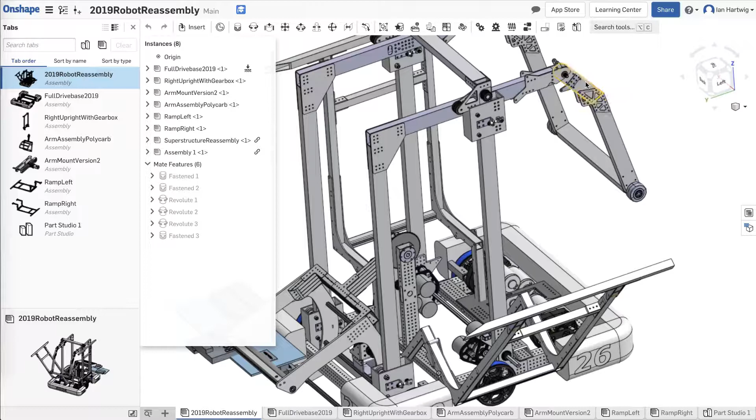You can see, for example, this tube is 2 inches by 1 inch across, and we put a bunch of holes into the right place, and then it has plates on the outside. There's other places where, for instance, there's 1 inch by 1 inch tube, like in these ramps, as well as in the drive base.

And typically, when we're early in development, we don't know exactly where things are going to go. We'll put this standard hole pattern on all of the tubes. So let's learn how to make these tube structures and efficiently put all these holes in.

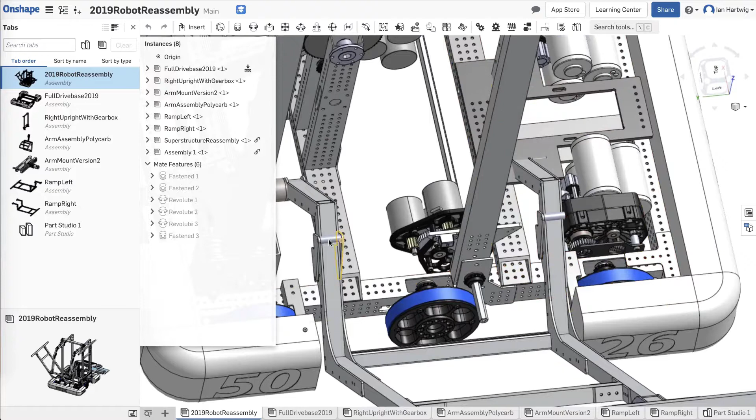So going back to the document we had before, we're going to go to the plus sign down here in the left and insert a new part studio. So now here again we're at the blank 3D canvas, and I'm going to rename this one to be drive tubes, since that's what I expect to be drawing. And we'll select this top view again and go back into sketch mode.

So in this case, the sketch is actually pretty simple. We want to start with the rectangle of the tube. So we're going to use that rectangle tool up here again, and we'll plop that down, and then we'll hit D for dimension.

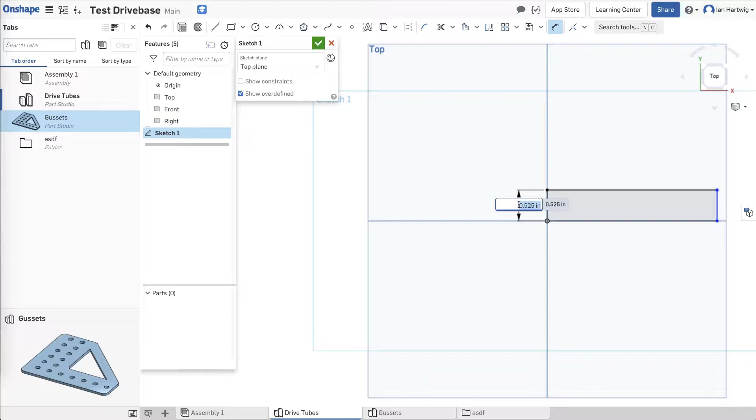Let's do the front tube that's on the drive base first, and that's a 2 inch by 1 inch, 1/8 inch wall. So we're going to put that 1 inch in here, and I happen to remember that the tube on the front of the robot is 27.75 inches long.

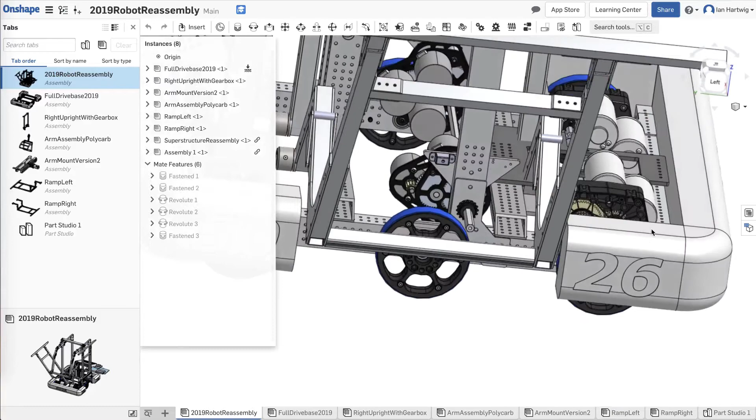Now if I wanted to look at one of our old models and remember what that was, I could go over here, and I know that the tube in front, for instance, is right here, and if I select an edge on it, you can see down in the lower right that it gives me a length. In this case, there's only one dimension of measurement, but it can actually give you many more dimensions here.

So if I wanted to know, this is actually going to come up in a minute, so let's do this to remember. If I wanted to know how much space there was between this edge and this tube over here, like this flat part, then I could select these two things, and if I go into the details, you can see a lot more information about these dimensions. In this case, it's just selecting the perpendicular distance, which you can see as I highlight is 2.37.

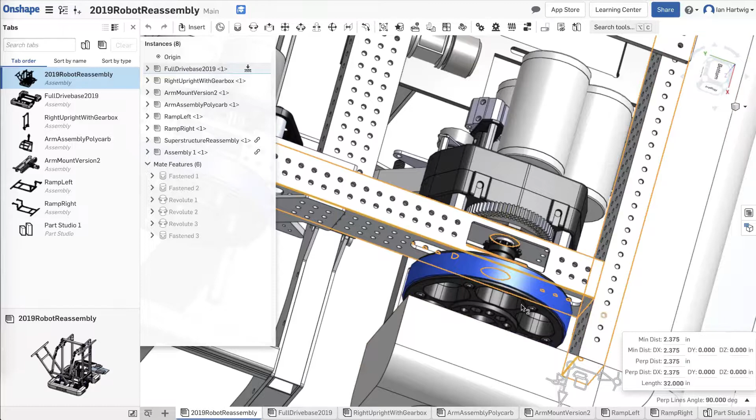But it could also tell you things like different colors. In this case, it's red along the tube because it's in the X direction. As you can see, that matches the colors up here of the cube. Okay, so let's remember that one as well, 2.375. That's how much space on this robot you need for the pneumatic wheels, which are a little bit bigger than these wheels.

Okay, so back to our test file over here. We actually have all the initial sketch dimensions we need, so we hit the green check mark. And now we're going to turn it into a 3D shape. So we select that sketch and Shift E, or just hit the extrude icon. So the default size, 1 inch, looks like that.

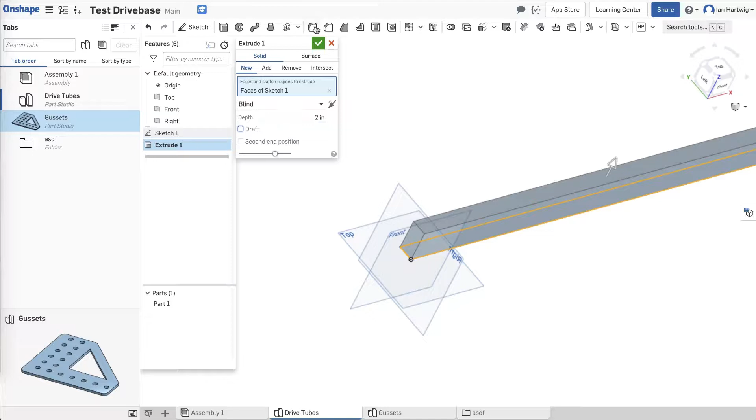So basically, if you were doing a 1 by 1 extrude, you could use this 1 inch depth. But since we want 2 by 1 for the front, we'll do 2 inches. Okay, so that makes the rectangle a little taller. Right now, though, this is actually a solid block. So to tell the CAD program that we want to use tube, we're going to use the shell command.

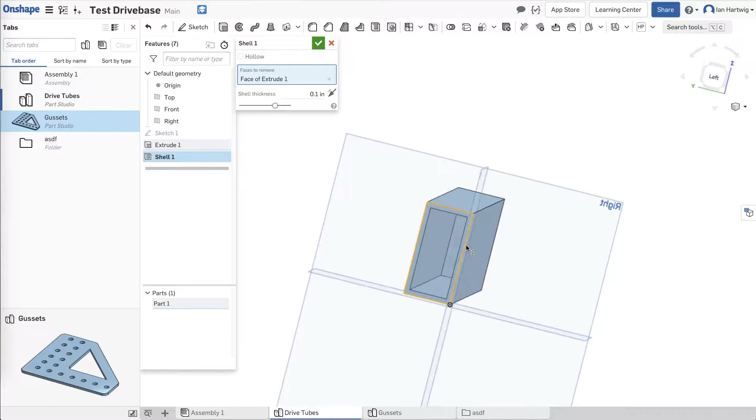And now it's asking us, like the other tools, to fill the blue box content here. So we can select this face on the end, and you can see that it digs out the internal of the part, but it doesn't go all the way through because it's calculating the minimum wall. So if we just swing around to the other side of the tube and select that, now we've got all the way through.

Okay, and we do need to adjust the thickness, so you can see there's a shell thickness field. We're going to use a 1/8 inch tube for this part. So we select that, it gets a little bit thicker, and then we click OK.

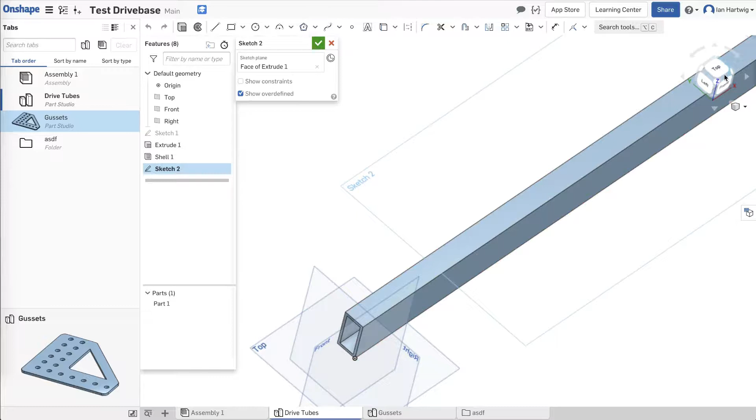So to put that whole pattern down, we're again going to use Sketch, but this time we will use it on the face of the part. So we can select this face on top, hit Sketch. So now this sketch is specific to this solid object. So I'm going to hop over here to the top view again, and we're going to use our circle tool again. So center point circle, hotkey C.

We'll just draw that in, and then we'll do dimension D to put in our 0.192 inch size, and also to put it at a 1/2 inch from the edge. So just zooming in a little bit so I'm specifically not using the angled dimension, I'm using the perpendicular dimension.

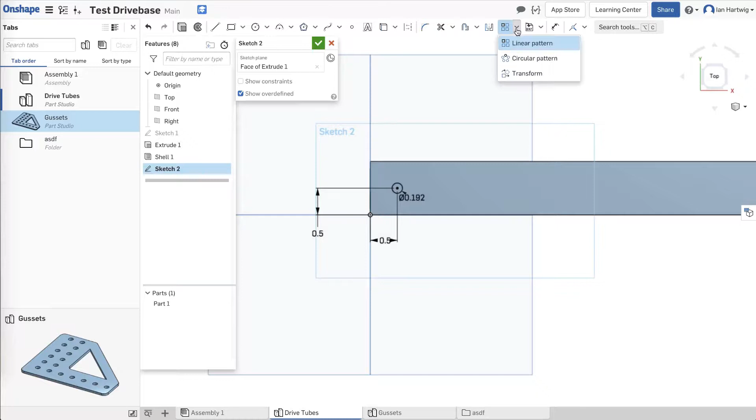Okay, great. So now, like the gusset, we can make this more efficient by using the pattern tool. So I'm going to select a linear pattern over here, hit that circle, and you can see that there's blue suggestion circles here. So let's change it to 1/2 inch spacing. And then we actually want a few more than 3.

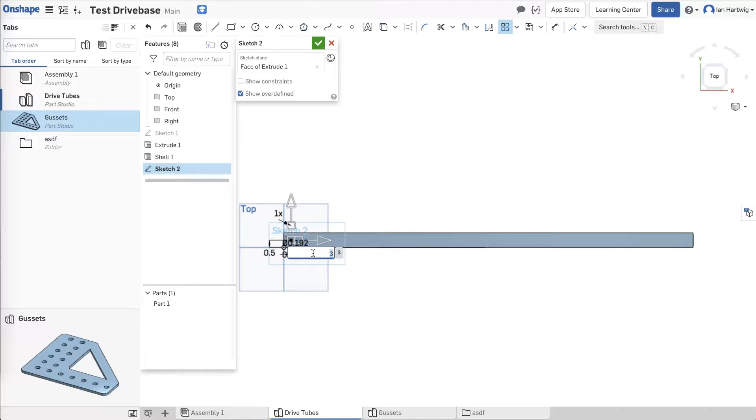So since the bar is like 27 inches, you want like 54, 55 holes. And it doesn't fill in all of the ones in between, but you can see that it draws the last few. So that's the number of holes that we want, and then we click green check mark to accept, and you can see that now we have a lot of black holes. Okay.

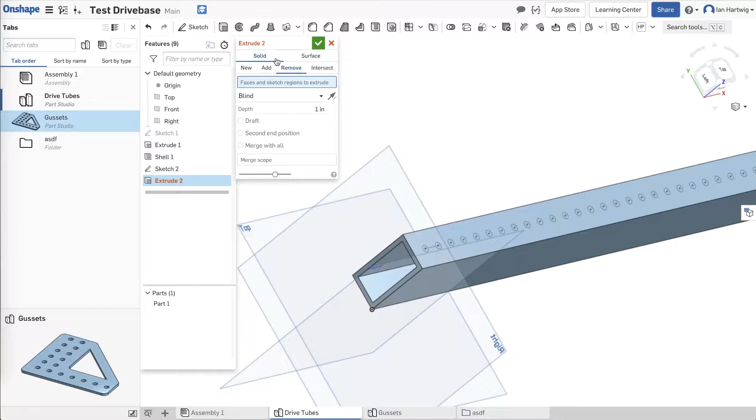This is actually all we need on this sketch, so we click green check mark, and now we want to tell it how to use this. So what we could do is select each hole individually. In SolidWorks you would have an extrude cut tool, but in here you just have the regular extrude tool, and then it has extra details in here, like you could use solid remove and then, for instance, you could select an individual circle and it will drill one hole.

But to be way more efficient about this, we're actually going to select the entire sketch, since all it has is circles on it. If we do extrude remove, it will drill all of our holes at once. So you might notice though that it's only drilling halfway through the part. That's because it has a depth set at 1 inch.

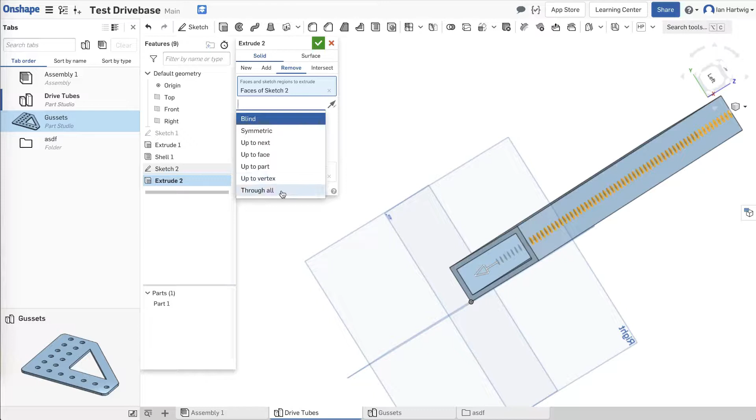We could change that, or we can change the mode to go through everything. So if we change it to through all, now you can see that there's holes in both directions. Okay, and we just click OK, and now we have half of our holes. So let's do the other face.

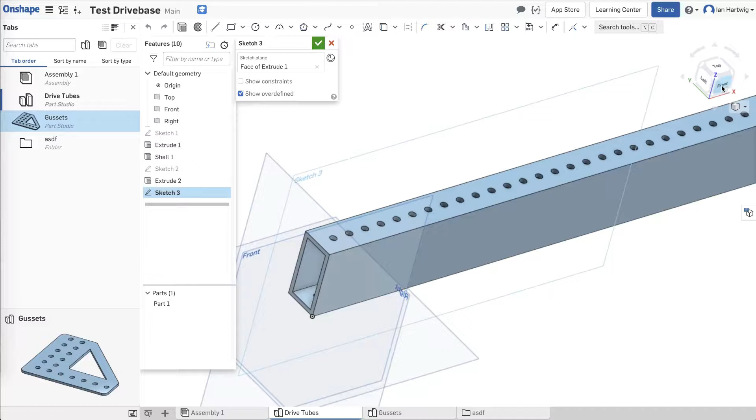We do the same thing, select there, select the front, hit sketch, and now I can jump to the front view. Like before, we can do circle tool, put this in place, we can dimension it, and we'll just put in that 0.5 inch from the front. So this is picking up the dimension in 3D of the shape.

To reduce the number of dimensions in the overall part, I actually want to connect this circle to the ones on the top. To do that, we could use a constraint like we did in the sketches. So I can select the vertical constraint. The only problem is you can see that there's nothing to attach it to. So if I click here, like I want to connect to the circle, then it basically doesn't do anything. So we need another sketch to attach it to.

And it's actually possible to get back to the sketch we used earlier. So you can see it's grayed out in the feature tree. But if we hit the little eye next to it, you can actually see that we get those items back. So now if you hit the vertical, you can select the point that's inside of one of these circles and then hit your point over here and it snaps into place.

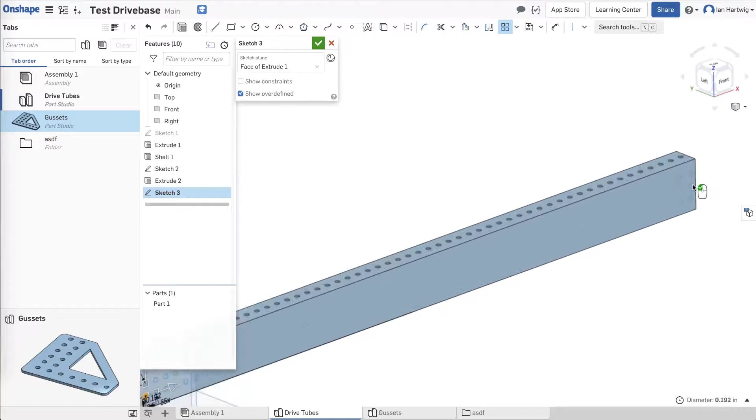Okay, now like before, we give it a pattern. We change the pattern width to be 1/2 inch. If I remember right, we had 55 holes. And we will also set the 2 direction pattern here. So we needed 3 holes at 0.5 inches apart. And now you can see that it fills in the entire front pattern. Perfect. So we accept that.

And like before, we take this, we extrude, solid, remove. We can go through all. And now we have our bar. So I'm just going to shut off that sketch too. And now we have our extruded bar with hole pattern.

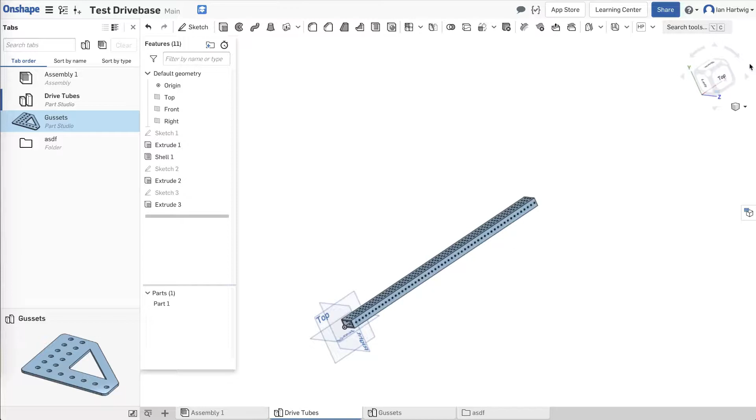So this is nice to have this one bar, but it's much more interesting if we're able to draw an entire structure at the same time. So Onshape actually lets us do this pretty efficiently. So let's go back to our first sketch. And in here, so now we're going way back in time, which is one of the features that this lets us do.

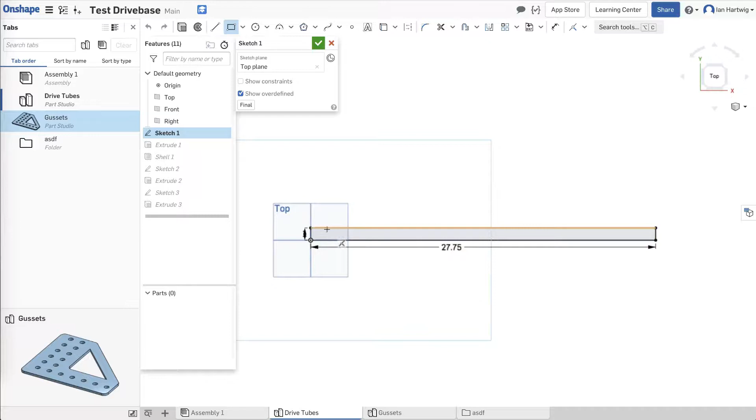And we defined this one rectangle, but let's say we wanted to draw more than that one bar. So I'm going to throw in a couple more pieces of drive base in here. So let's say that we also draw our side tubes, and you can see that it's a little bit interactive on the constraints here. If I highlight to this dot and then I go over, it's actually telling me it's going to fix this point vertical and horizontal. So I'm going to do that.

And now this becomes our back tube right here. And I'm actually going to draw a few more items in. Maybe I'll draw them off to the side here. So these are actually going to be kind of our wheels, so we have a picture of where they are. And again, I'm going to use the dash line here. We can follow this down. And then I'm going to put another one up here.

Great. So let's add some dimensions in here. So the endpoints of this are already fixed because they were attached to the bottom. This one, I happen to know that our drive tubes we like to make 1.5 inches thick. If you remember from earlier, we measured the distance. So I'm just going to cancel that and go back in. Earlier, we measured the distance from here to here as 2.375 inches. So let's just put that right in here.

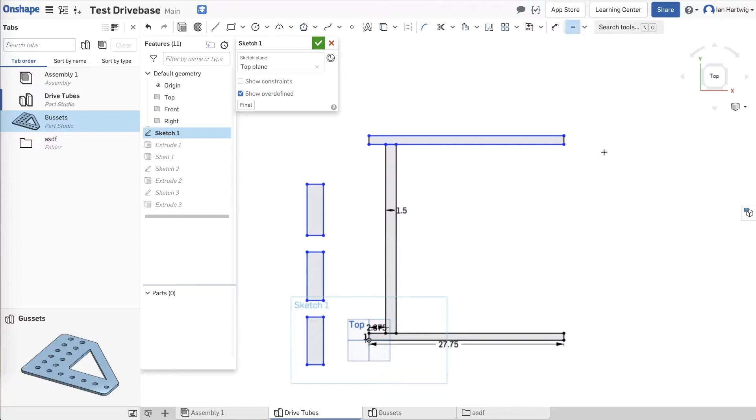And we still have a couple blue bars left. So what we want to do here is fix the front and the back tubes to be the same thickness, so the same type of tube. I can use the equal constraint for that. So let's make this line equal length to this line. Great. I'm actually not sure why those lines are still blue, but that's just because the length of this tube is not set.

So because there's a total size for the drivetrain length, I happen to know that this is actually supposed to be 30 inches long. And we can also prove that that's how long we want it to be because we could draw hypothetical wheels off to the side, if you were going to use this as a master sketch that showed how your geometry works. So for instance, I'm going to dimension this wheel. We usually use 6-inch wheels.

And then let's say I don't want to dimension those again, so I'm going to use equal to say that this length is equal to this length, and this length is equal to this length. And let's throw in one more, which is that in past years, the length between our wheel axles has been about 11.5 inches. You can see that it's actually not really letting me select the middle of this right now, and I don't want to calculate the distance between.

So what I'm going to do is go L for line, and if you use the line tool, it does snap to the middle point here. So I'm going to draw the midpoint across these. So I did escape to cancel the tool and then L to get back in. I guess you have to hit L twice. Okay, so now I have all these lines. None of these are actually going to be real geometry, so I'm going to select it all and then right-click Construction.

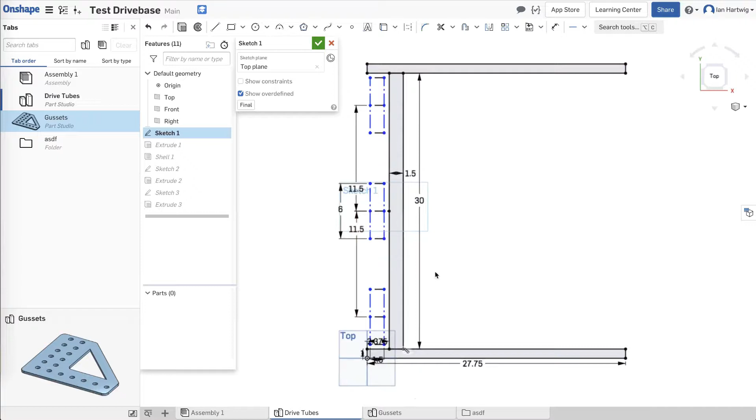Okay, so let's take this drawing, and we're actually going to turn it into multiple pieces of extrude. So let's leave the sketch. When we leave, we can see that it's actually created that whole thing into different tubes. So let's go and undo that actually.

So I'm going to edit the very first extrude, X out the contents of the blue box, and instead of selecting the whole sketch, I'm just going to select this one rectangle here. Okay, so now if we do that, it's 2 inches thick. We click the check mark. It's just going to go back to being a single tube.

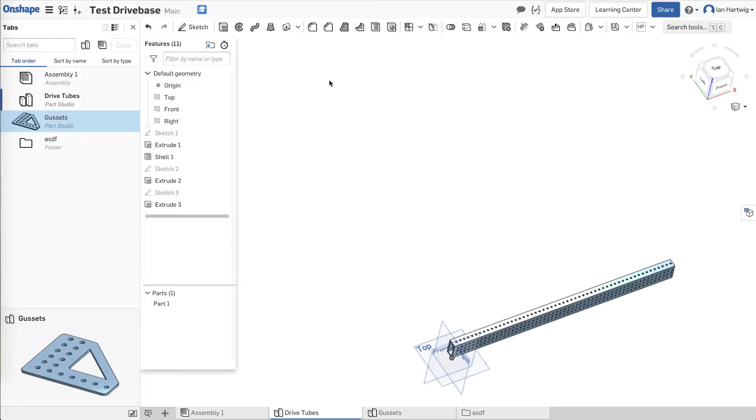From here, I need to create more tubes. So we're going to unhide that first sketch again. And then we can go back to the extrude tool. And a key part here is we're going to do solid new. And then if we select this side piece, now it's going to make a totally new part. So again, we want it to be 2 inches thick. And then we select OK.

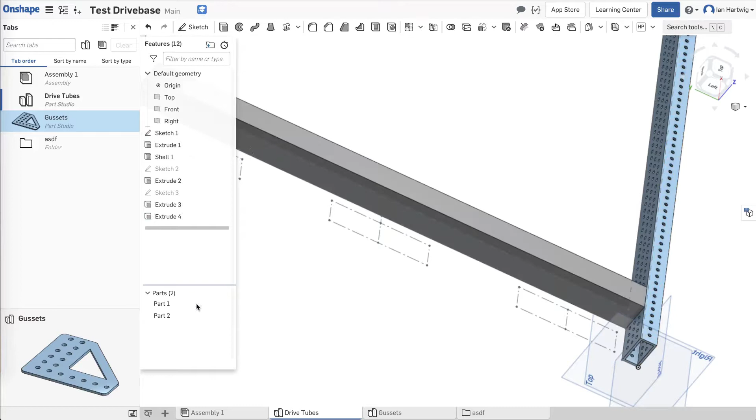Oops, sorry, it must have defaulted back. So this is the difference between add and new. It defaulted back to doing an additional piece. So you can see that they're the same color, and it's basically one solid part. But what we actually want is, I'm going to double click Extrude 4 to edit. We want solid new part, and you can see it's actually a different color. And then we check mark, and now we have two separate parts added down here in the part window.

If we wanted to, we could also extrude the back bar. So we could do solid new part, give it that 2 inches of thickness, and now we have 3 discrete bars, and we could give them separate names down here. So we could do your front tube. I'm going to right click rename. Well, if that's the front and you're going down the road, this is actually your drive right tube, and this is your back tube. Okay.

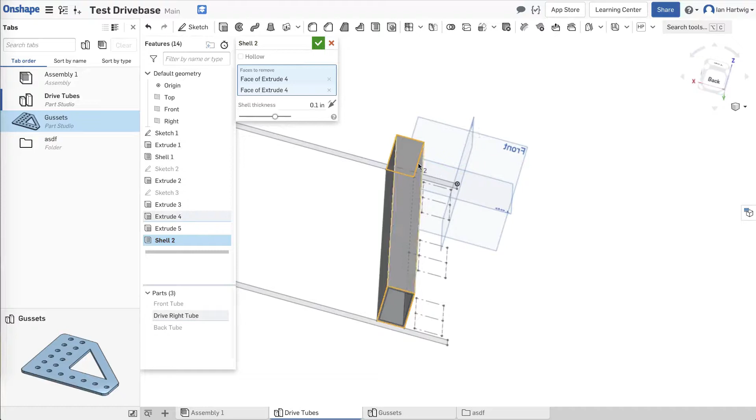Great. So just like the sketches, you can use this part area down here with the little eye to hide and remove parts. If something's in your way, you can also use the shortcut Y to get rid of that, and then you can bring it back over here. I needed to hide those 2 parts because I need to see the end of this so that we can do our shell action. You kind of got to do all these operations per solid one by one. So we're going to make that also 0.1 inch thick.

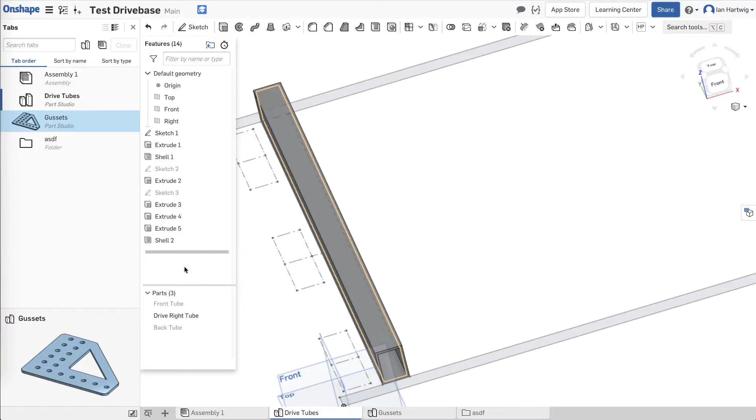Great. And because all these things have different names, we can actually group a bunch of items together. We know that everything from here to here is all part of this front tube, right? I'm going to hit blank space to unselect. So to clear things up, you can click and then shift click at the end of your selection, right click, add selection to folder, and you can make this all part of the front tube.

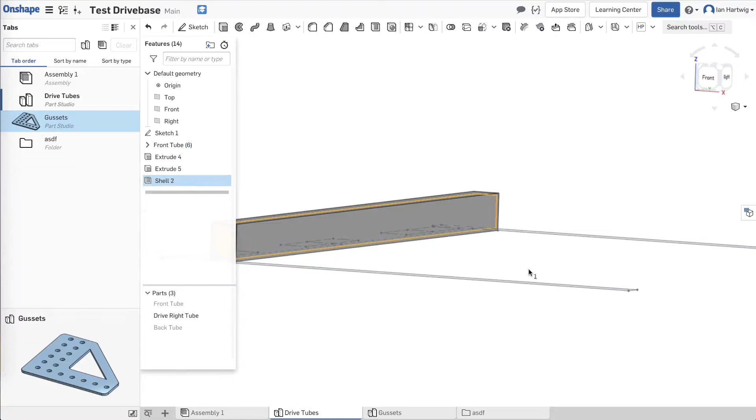Okay, so now it'll hide those items, and we can move on to making this side tube. You can also drag and drop this stuff around later, so it's very easy to organize all of your different features. Just like before, we can go in here and put our hole patterns in. So we can do sketch, and we're going to go back to the top.

So now we use our circle like before. We give it a dimension, and we're also going to dimension it onto the part itself. So this is adding that 0.5 inch here, and adding that 0.5 inch from the front. Okay, and then we're going to do the linear pattern again. Set our spacing to 0.5 inches. In here we only want 2 across, so we're going to do 2x.

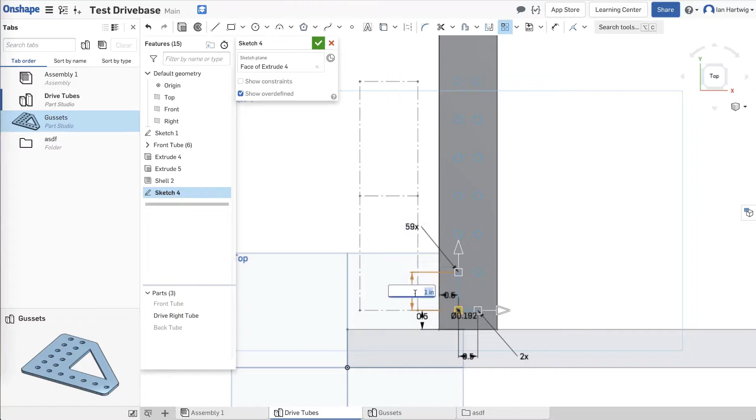And then in the vertical direction, it was a 30-inch tube, so I think that means we need 60 minus 1, so 59 holes. And now the spacing appears, so we can change the spacing here to 0.5 inches. And if we zoom out and look at the top, the holes are in the right place. So we hit left mouse button to keep them.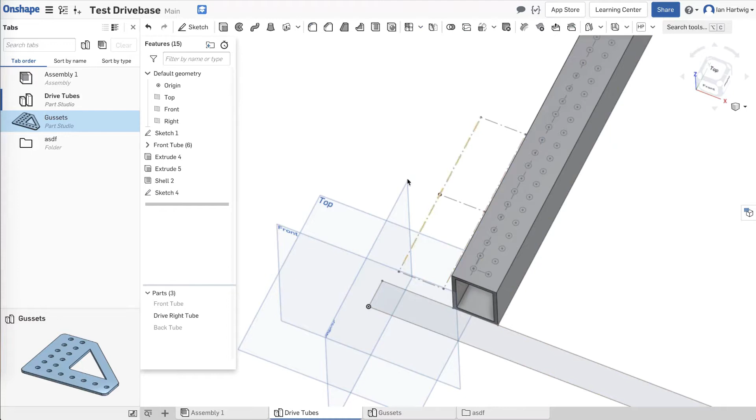Great. So that should be good for the top holes. I want to turn that front tube back on, because one of the things that you may notice here is, because the front tube is kind of an odd number, now these holes don't actually perfectly line up.

So we can go back and adjust that if we go to, remember we defined this in sketch 2, and it was important to draw sketch 4 in order to get to this, but this means that the gusset plates that we drew wouldn't line up, and this is actually a problem that we faced lining up these tubes for the competition robot in 2019, and it helps to define all of them together so that we can fix issues like this very quickly.

We can actually link these together if we go to Sketch 2, and we're going to edit that here. So I'm going to delete, actually, one of the things we need to do here is that we would actually need to define the side tube. We actually need to define the front tube later.

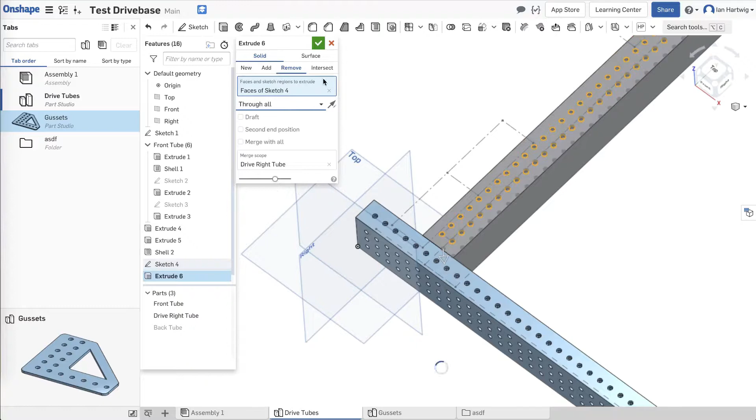So let's complete our extrude of these items. So let's do that extrude remove through all. Great. Okay, so now we have those top holes going all the way through. And the reason I paused there is because we're going to rearrange our feature tree a little bit. So extrude 5, let's just tuck that into the end.

Everything that's related to this side drive tube, let's add these selections to folder, and we're going to do drive right tube. Great. And the reason I wanted to add this to a folder is I'm going to bring this whole thing up above the front tube. So it regenerated everything. It finished the little spinny thing, and it all came back the same. The reason this is important is because we need this drive tube geometry to exist in history first if we want to base the front tube off of it.

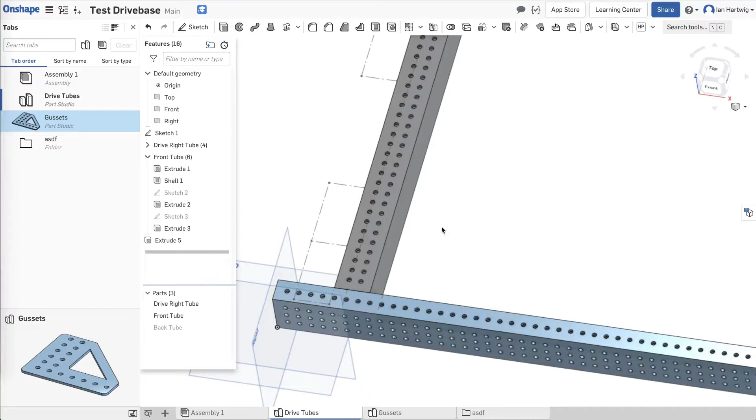Part of what's so powerful about these programs is that you can kind of drag and drop the order of operations around, and as long as you're careful about how you put it together, it often works. So now let's go back to Sketch 2, and if we double click this, we're now editing the sketch. I'm going to snap, actually I'll just move a little bit to the side. What I'm going to do is delete this dimension here.

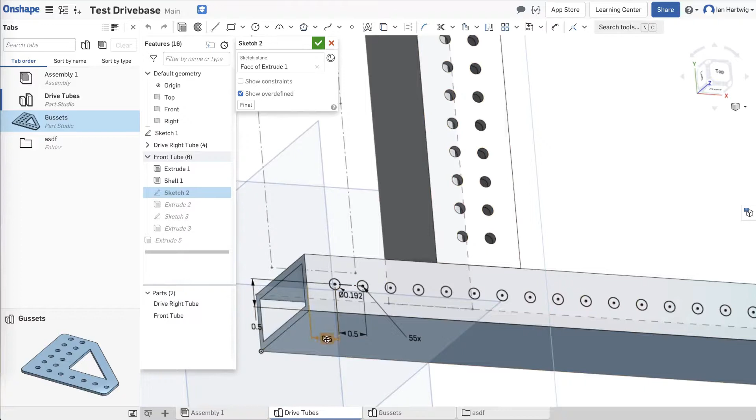Okay, so now all of our circles have gone blue again, and the reason why is because they can be moved from side to side. What we want to do is force these holes to line up with these holes. In order to see where those holes are, we need to go back to this sketch here that defines them. So I'm going to turn this sketch on. Okay, so now we can see all of our little points, right?

And then we can define in our current sketch 2, we can define that I think the right constraint here is horizontal. So we want this to line up with this. So I'm going to click here and then click here, and everything is red because it's not constrained correctly. Well, it's over constrained. That means it's not able to solve it. So I'm actually going to undo that.

I think the correct answer was the vertical constraint. So we're going to select here and select here, and now it snaps into place. Everything is black. That should mean it's fully solvable by the computer, and it's guaranteed to line up. So we hit the check mark, everything regenerates, and we get our holes back.

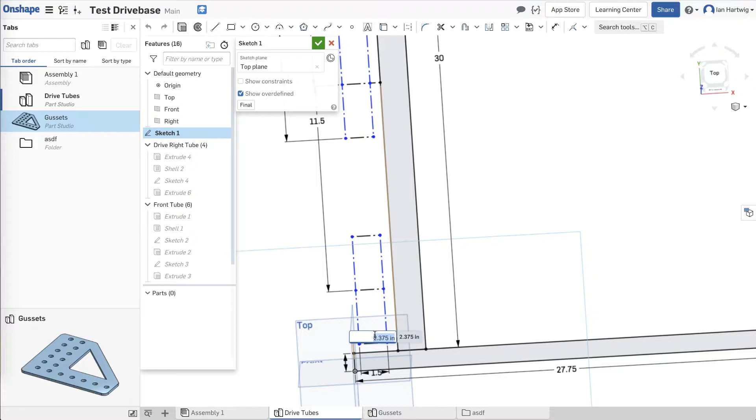So the reason this is really powerful is because if we wanted to go into the master sketch here, and let's say that we needed to move this line over to actually be like 2.5 inches, and then we leave this sketch, it will take a minute to regenerate everything. But now this is moved over, and all of the holes are lined up correctly.

So if we were still in the design phase, our placement would be correct just by moving those over. Of course, there's, oh, actually, it actually is filled correctly at the end. Okay, but we're actually going to undo that change, and you'll see that it just shifted over.

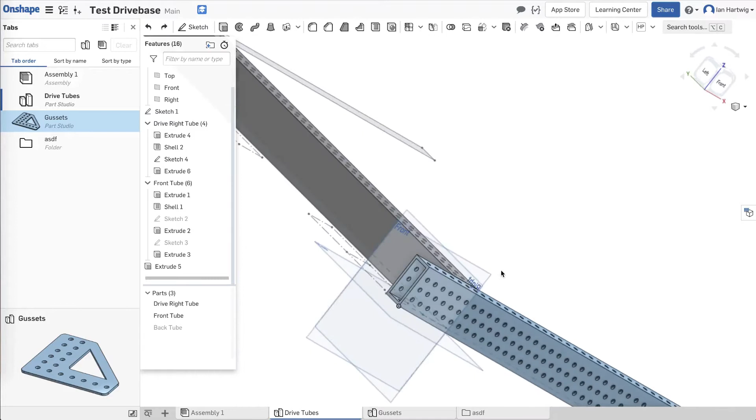Continuing with the drive tubes, so we kind of have this idea of where the wheels will be, but we need to add bearing holes for the axles, as well as mounting location for the gearbox and the hole pattern on the side.

Since we moved the drive tube definition up here, and we want to group the new actions together, we can actually tell the program to start drawing from a time that's farther back in history using the rollback bar. So that's this kind of thick bar at the bottom here. We can just click it and drag it up to inside of this folder that we created earlier. So now some of the stuff on our screen will disappear, but we're effectively editing an old point in time.

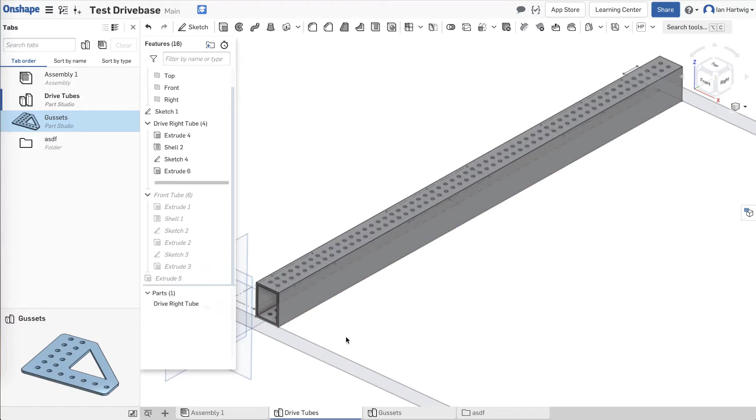So now we can go back to that mode where we start to draw on the side of the tube. So we'll go into sketch mode after selecting the side of the tube. I'm going to jump to the right hand view, and I first actually want to draw in our axle locations. So I can use the hypothetical drawing we made on the ground to pick the center point and kind of put it in here somewhere.

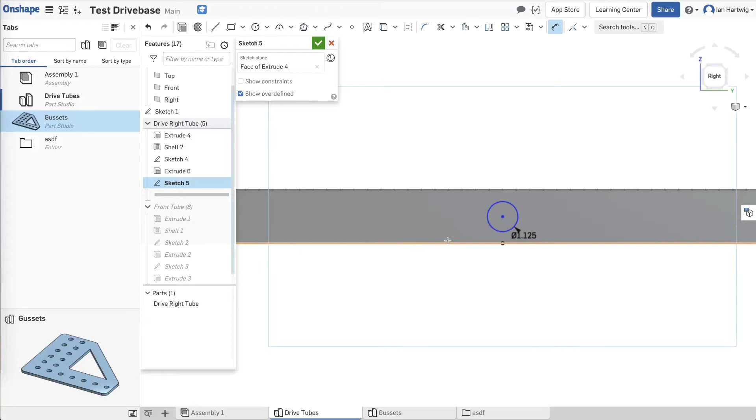Again, I'm using the circle tool. I clicked the center point, and then I click again to make the circle. I'm going to give it a dimension. The outside diameter of the bearing is 1 1/8 inch, so 1.125 inches. And then if we want to actually take that dimension, I believe I can copy and paste this circle. That actually creates a copy of the dimension.

But in this case, we'll do that again. We'll paste one more circle. But instead of having 3 copies of the dimension, I'm actually going to delete that. And we'll set up an equal, so that's E, between this one and this one, and this one and this one.

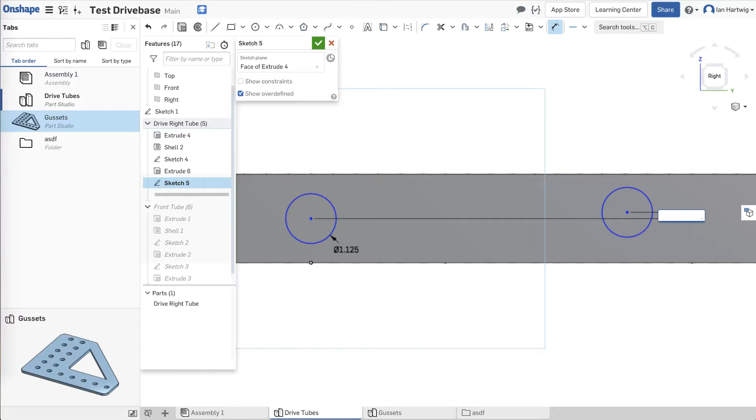So another technique we can draw in here is, usually for a 6-wheel drive West Coast drivetrain, the middle axle is actually just a little bit lower than the other ones. So while we're doing constraints, I'm going to set up a horizontal from here to here. And then we're going to set up from here to here. You can see it lets us do that perpendicular vertical dimension. This will be really small in real life, but let's actually set it to something kind of large for now.

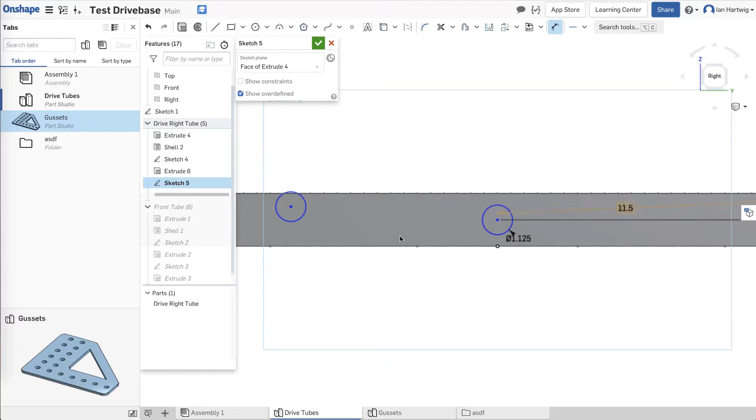The reason we're going to do that, so you can see that they're both up here, is now we're going to draw in our dimension for the chain centers. So from here to here, we're actually going to use the angular dimension. See how it snaps right there to an angle? Let's pretend that our chain calculation told us it should be 11.5 inches. It probably won't actually be a round number like that. We're going to do the same thing here. Insert that angled dimension, 11.5 inches. And now we can change our drop center back to something more reasonable, like 1/16 of an inch. Great. So now it looks almost flat, but you know that these 2 dimensions are actually angled.

And we can set up our nominal center to be in the middle of the tube. Actually, we can set the other 2 to be the regular size, so we can actually subtract our 1/16 of an inch. And it will actually do math as long as you don't put units in. Oh, I see, or it'll insert the parentheses for you. Great. And now that everything is black, it should be constrained.

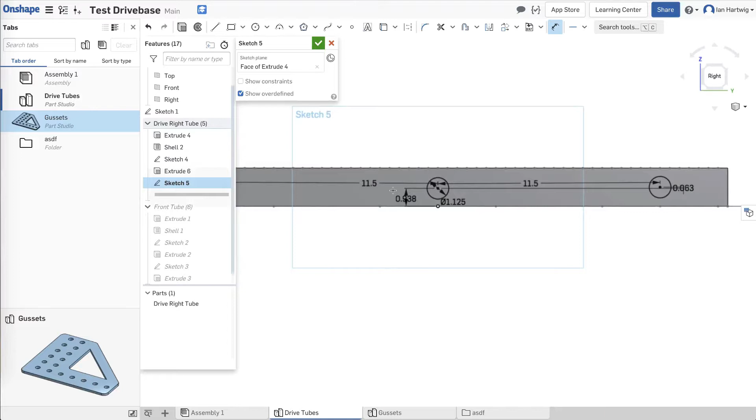One extra bit that I'm going to add in here is, let's also draw in the gearbox mounts. So I happen to know that it's going to consist of 2 bolt holes, essentially. So let's draw those in. I don't remember the exact size of them, but let's just guess that they're gonna be 1/4 inch holes. Actually, you know what, we don't actually have to guess on that part.

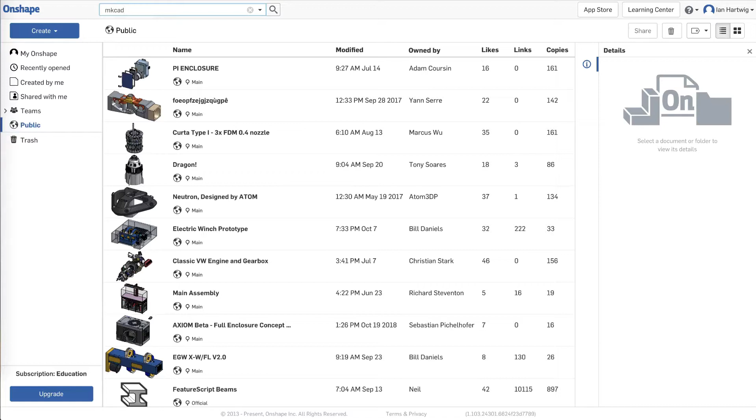One of the great parts about the Onshape library is that we can actually, I'm just going to jump over to this other tab, and go to the home page, and let's go look for the real gearbox. So I'm going to select public documents, and a lot of things are in the MKCad library, which is from another team that publishes a lot of parts.

And so if you look for MKCad, you get all these different categories of parts, and the one that we want is probably in gearboxes. So I'll open that, and I think I had looked at this before, so actually the document I want is here, CIM Ball Shifter with 3rd stage.

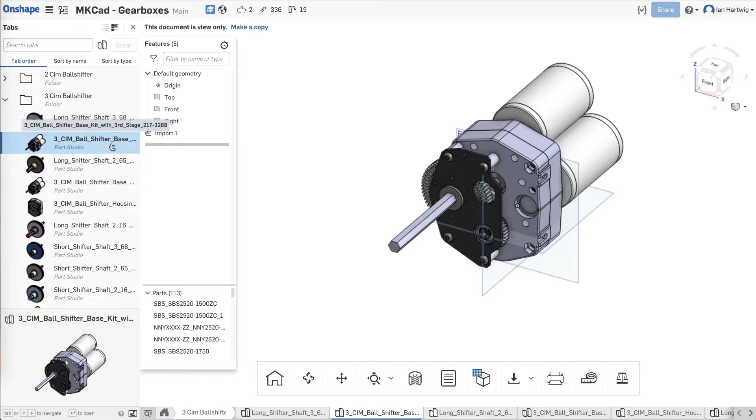Okay, so we look at it here, and if we start to use the dimension tool, this is our 1.125 inch bearing hole that we just put in, and these are the 2 bolt holes that we really want to know. So I'm just going to select the bolt, hit Y to hide that real fast, select the other bolt, hit Y.

And the reason I'm doing that is because now I can see the hole that they made in the plate. So if we select this, you can see that the diameter of the hole is 0.26 inches. So we're going to remember that to put on our system. And also, if we select this circle, and then we go down here to the measure details and expand it, you can see that it gives you a 3-dimensional measurement, exact measurements. So the red axis is X, so they're lower than the center of the bearing by 0.18 inches,

and they're 1.975 inches. So this part's a little weird. I happen to know that if you go from hole to hole, which is a dimension they give you on the data sheet, this is actually 4 inches, but then for some reason they're not actually centered from here to here. This is like 2.051. So let's just draw it as 2 inches from here to here to here.

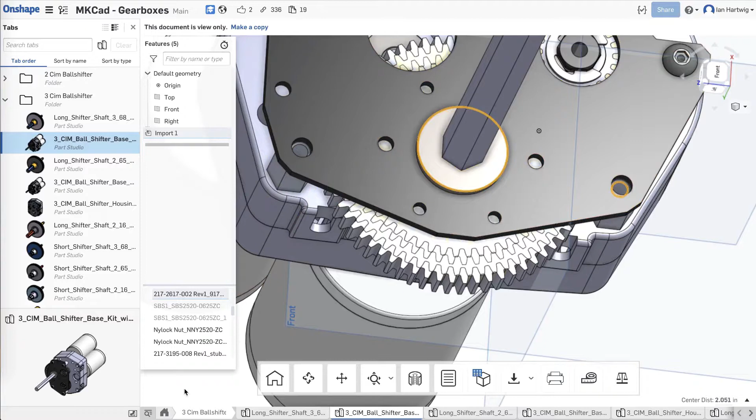But the key part that we pulled off of here is, I'm just trying to select nothing on the screen here. It's not cooperating. Okay. Trying to select blank space. Okay, so if we select from this circle to this circle, we can see that we need to put in a drop of 0.18 inches. Okay, so let's copy that back over here.

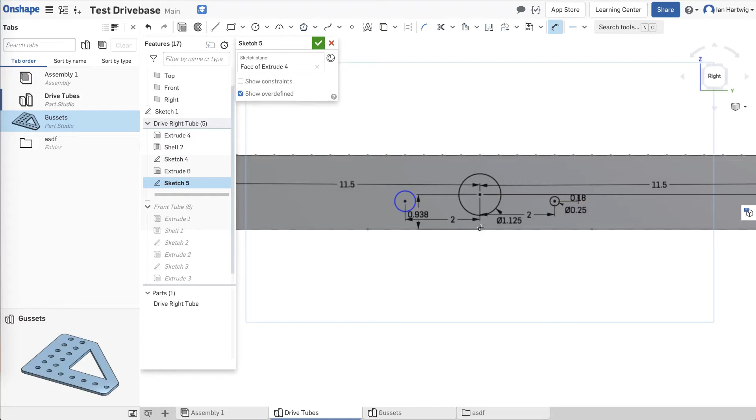We're going to set this up as 2 inches. We're going to do the same thing over here. This is your 2 inches. And then the vertical distance here is that 0.18 inches. Great. And now this is still blue, so let's fix that up by adding an equal constraint between the size of this and the size of this. Perfect.

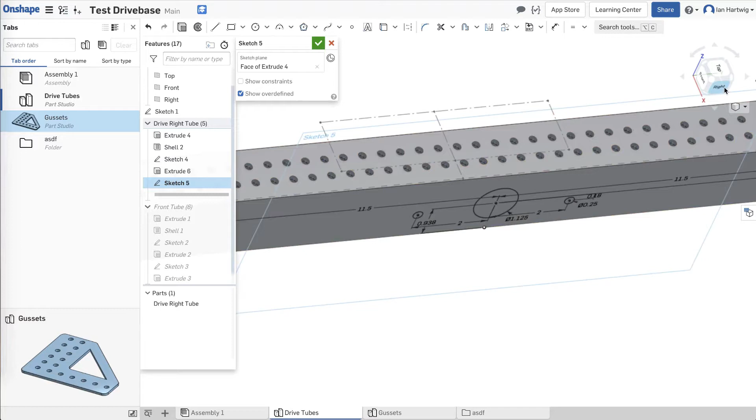We are missing an extra piece here though, which is that when we put the gearbox on here, it's going to bolt directly to the frame, but we actually need an access hole on the other side. So to do that, let's go back to this view, and let's draw in an access hole. So normally we would actually use a circle or something, or a slot, I guess.

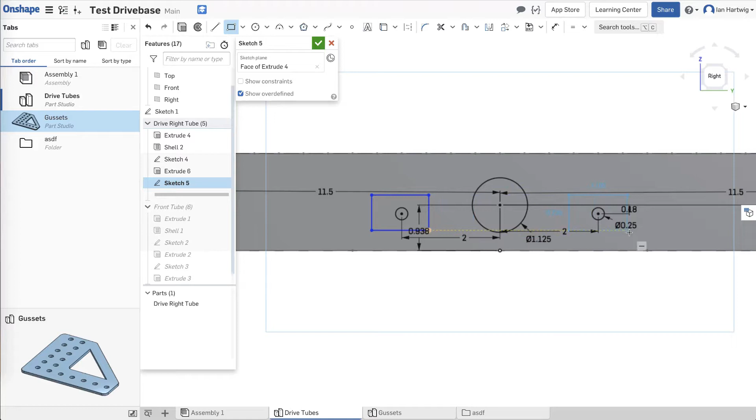But for the purpose of this tutorial, to make it look really different on the other side, let's actually draw in a rectangle. I'm going to make these rectangles connected together by using this automatic constraint here. Let's see if we can get it to do one like this. And then we just have to add a bunch of arbitrary dimensions here.

So I'm just going to make it like a 1/4 inch in each direction. And then we'll kind of make it look like a slot like this. Normally we would make sure that the tool fits through this hole. Okay, great. Now everything is black, so everything is constrained, and then we hit check mark here.

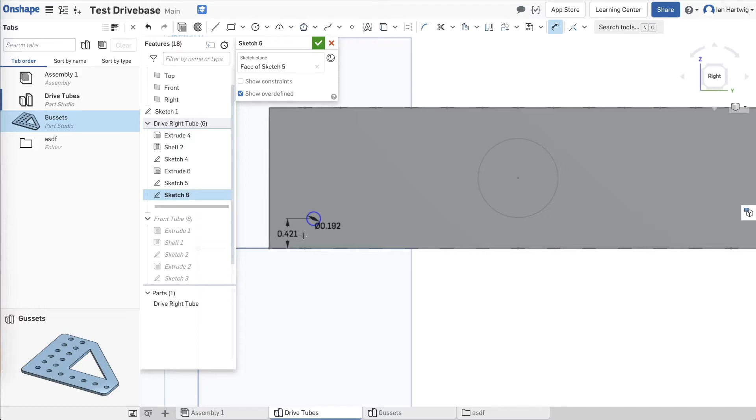So before we go and extrude this, I actually want to put in the rest of the holes. So let's actually start another new sketch. Great. Okay, and just like we did on the front extrude, we're going to put in this circle here. Going to dimension this. We're going to dimension that to the edge of the part to be that 1/2 inch here. And we can do the same trick that we did on the front tube. And we can use a constraint, which I believe is horizontal here, from this point to this point.

Okay, that's not the right answer, so we're going to use the vertical constraint there, from this point to this point. So I just did Control Z to undo that. Okay, so now it lines up. So the linear pattern is supposed to be here, but I think I selected something by accident. So I'm going to do the arrow to select linear pattern.

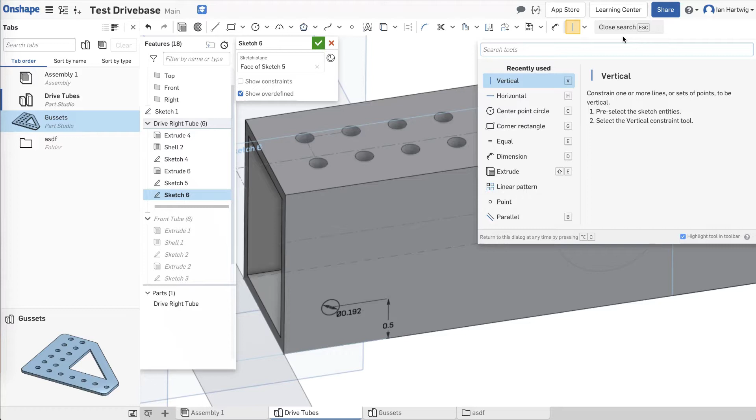The other way that you could get to the tools is hitting the Search Tools button, hitting the Search Tools panel, and then you could actually look for linear pattern and then hit Enter.

So we're going to just insert the parameters here. So that's 3 high, 0.5 inch spacing, 0.5 inch spacing this direction, and I think we said we need 59 holes going all the way out there. Right, just to the end of the tube like that.

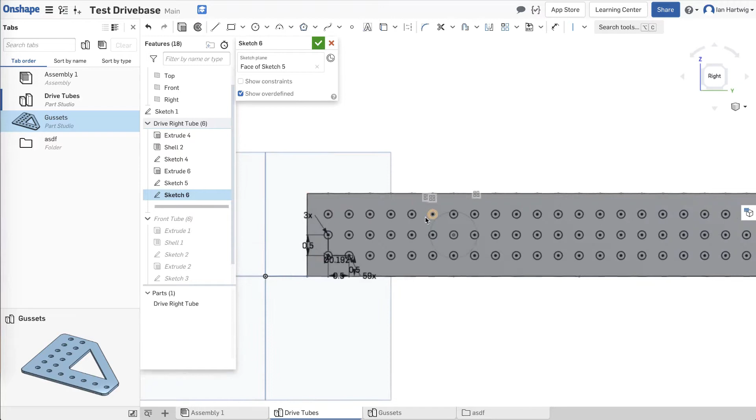Okay, the reason I wanted to do these together is that if we just extruded this right now, we would have a conflict between the holes for the bearings and the holes for the pattern. So to get rid of that, just like we did on the gusset, we can select a whole area of holes and right-click construction, and that will make those not extrude.

So same thing when we get over here to the mounts for the gearbox, actually we can even select some more here. We can take this whole swath of holes, convert those all to construction, and those will not bother us now. Okay, we can select more here, convert these to construction as well. Great. I'm going to use this isometric corner here to jump into the isometric view and exit the sketch.

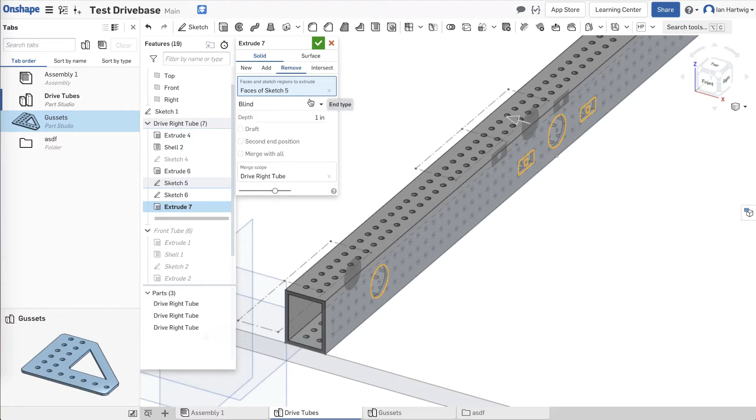So now we can take all these sketches that we made. Let's see what happens if we just try to extrude this. So we do extrude, solid, remove, and we wanted to do through all, but you can see that this isn't quite what we were expecting. So the bearing holes look fine, but this whole thing with the access holes and the actual bolt holes, that didn't quite work out. So we're going to X that out.

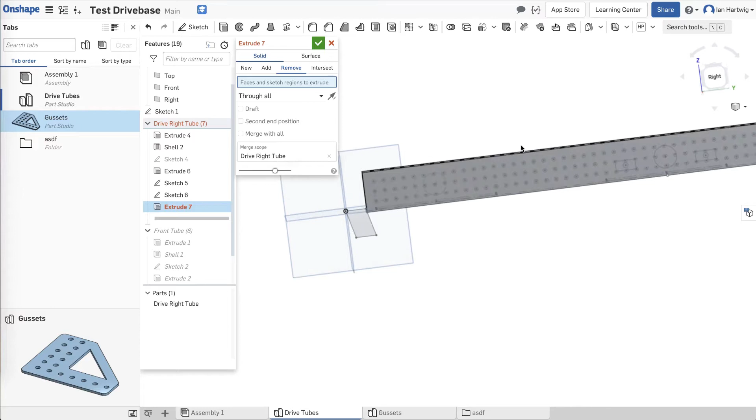And in this case, we will select exactly the items that we want to remove. So we're going to remove the bearing holes. So these are the through all components. So the bearings are going to appear on both sides. So we remove all the bearing holes. And then the inside, not that one. What I'm trying to select is actually the circle on its own without the box around it.

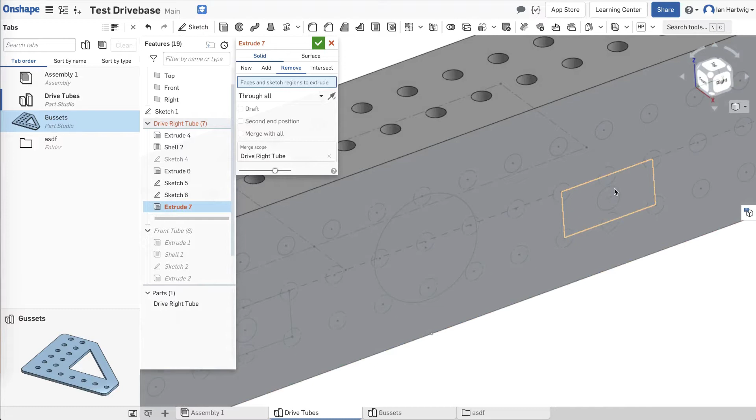Okay, so zooming in a little bit seems to help actually selecting just that circle by itself. Okay, so I'm going to select each of the circles for the bearing holes and the bolt hole mounts. We're going to change that to through all, and you can see that that appears on both sides of the tube. Okay, so we solid remove all of these things. Great.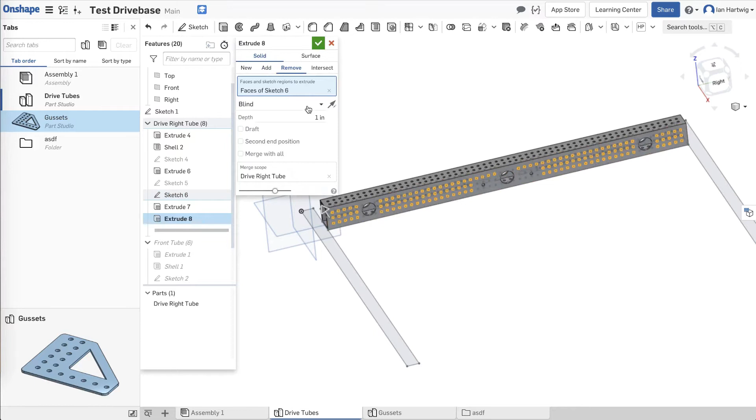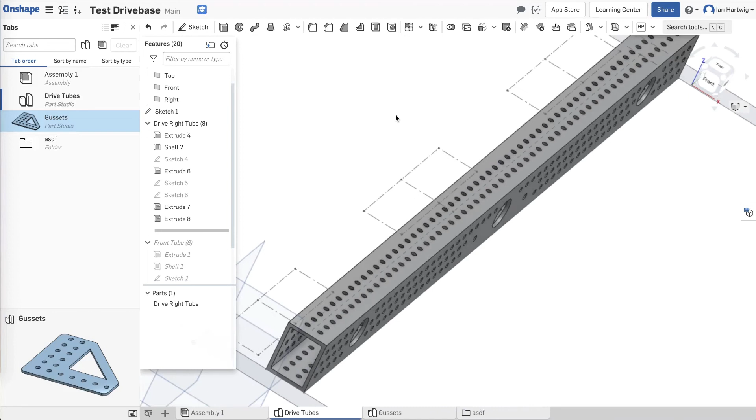We're also just going to take out the rest of those holes as well. So we extrude that as well. Solid remove through all. And if we check OK, now we have holes on both sides of the tube. We do face a little bit of an issue here where we need to get a tool inside of this tube in order to install the gearbox. So we need to go back and get our access holes, but we only want them on one side.

So to do that, we'll go back to the sketch that has the access holes in it, which is sketch 5. I showed that again. And if we go to this extrude tool again, we do solid remove, and we select those two areas that we really wanted before. So you can see that by default, it's going to start at this face and take it out of both walls. If we only want it to come out of the far wall, we can change the end condition here to through all. But then we can hit this checkbox for second end position.

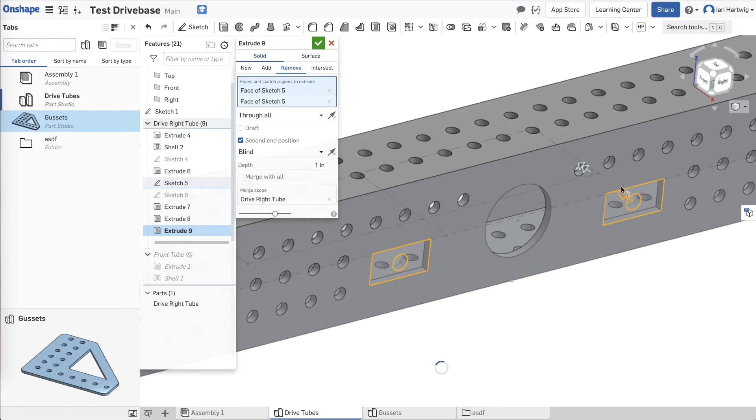And this is where it's actually going to start cutting away material from. So you can see that the second end is going this way right now, but if we click it, it will go the other way. So right now, you can see how it does not take material off until an inch in, and then it removes from the second wall.

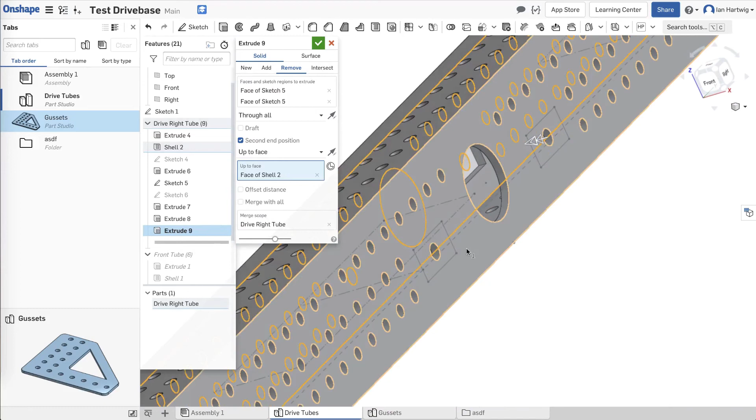You can also use different options here, like up to face, which is actually from face. And then if you select the inside wall, it will start taking it away from the inside of the tube. So that way arbitrary numbers like changing the tube size doesn't impact how you extrude. And we can preview this and we can see that it's created a cutaway access on one side and the actual bolt holes on the other side. So we hit check mark and we can hide the sketch. And we can hide this sketch too.

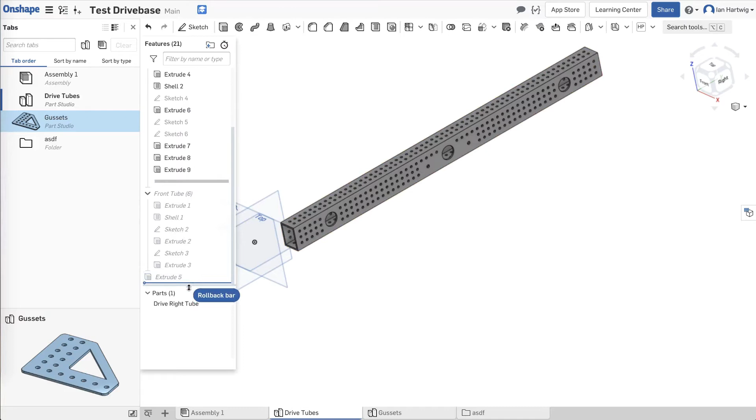And now we have a drive tube. So it's got access holes on one side, bolt holes on the other. And to get back the rest of our stuff, we can now move the rollback bar all the way down to the end. And it should redraw that front tube like we had before. So this is good if we only wanted one copy of a drive tube, but I don't really want to do this much work to get the right side drive tube as well. In this case, it actually is kind of symmetrical.

If we made more mount back here, then it could be made unsymmetrical. Let's just assume that we need to have a left and a right version. We can do that at this solid model point just by using the mirror tool. So if we click into this, we can see that there's different options. We can use it to mirror geometry if you use the add or remove, but you can also use it with a new option, which will just create a totally new part.

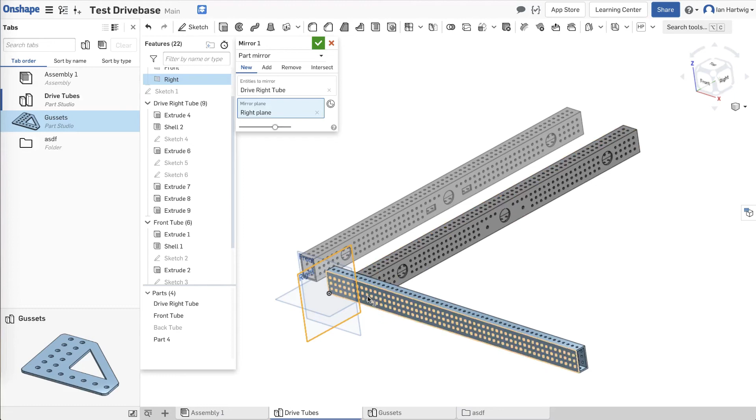So it asks us, what do you want to mirror? So we would select the drive right tube, and then it asks us, which plane do you want to mirror it across? You could select this right plane, but it will literally make another copy of it kind of over here, which doesn't really help us think about how these parts go together. So what we could do is actually draw ourselves a plane.

So if we jump into here and we look for plane, then we can actually make a copy of this right plane. Well, there's a couple ways to do it. There's one type of plane that's literally called midplane. So if you use midplane and you select the middle point of here, it will actually put a plane through the middle of this extrude.

Another way to do it is to do an offset plane, and we can take this plane that's perpendicular to the front tube, and we could specify a distance, or we could specify a point. For example, we could use the midpoint here, and you can see that it's inserted a plane in the middle of this bar. So let's do that. They're basically all the same to create a midpoint plane.

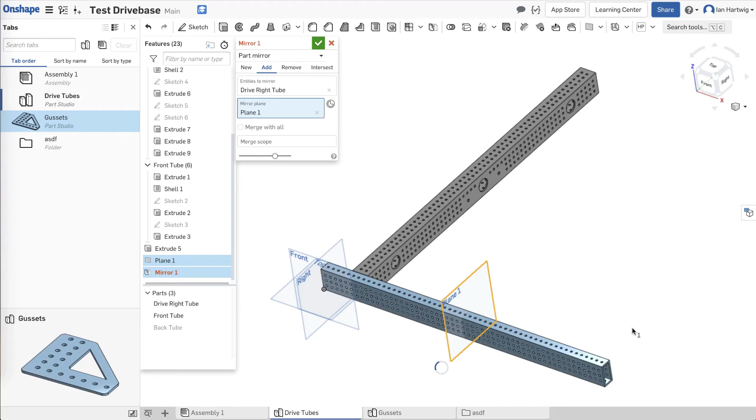And now we can go back to our mirror tool, and we can mirror the drive right tube, have it make a new part, mirror it across this midpoint plane, and you wait a couple seconds, and now we have a copy of our drive tube with everything connected. Okay, and this is actually going to create a new part. Oh, I'm sorry. You can see that they all changed to the same color, so everything got merged together.

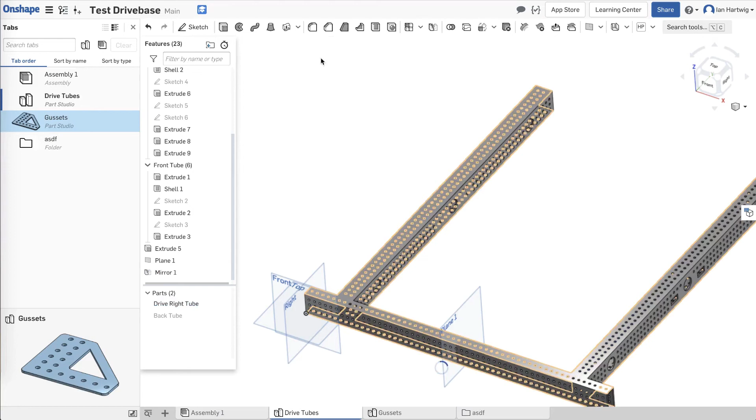If we edit the mirror and we actually make sure that it says new part, and then click check mark, it will actually show up as a separate part. Okay, here we go. So now you have part 4. It's this piece over here. If we rename it, we can give it the drive left tube. And now we have these two discrete parts.

To demonstrate why this mirror is really powerful, if we go back into the drive tube and we modify, let's say that we wanted to add a second gearbox mount location, right? So this is actually something we have drawn in before. So I'm going to use that automatic snap, and then I'll make these equal. And then we'll draw in our spacing.

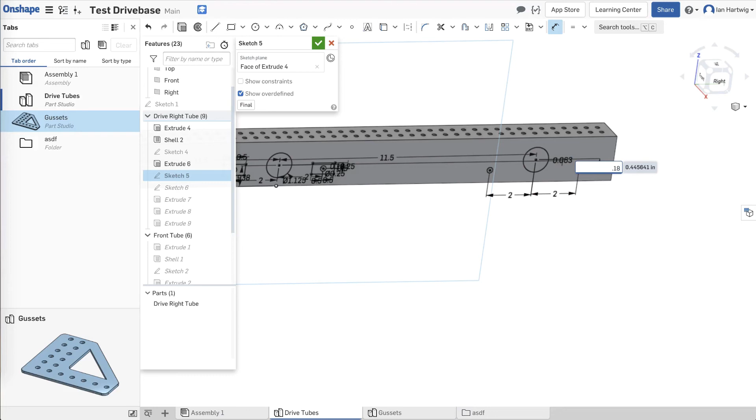Okay, so now I made another copy of these bolt hole mounts for the gearbox. And I probably also need to go edit the extrudes that go with that. So we would want to extrude a copy of those circles. So we would need to zoom in here and take these two circles out, right? And we probably want to take away some of the... oops.

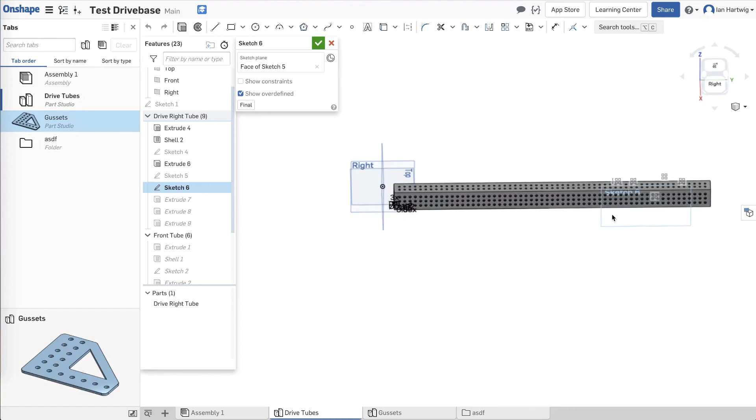So I got lost on the part here. It's because the sketch is hidden. So if I unhide the sketch, then you can see that here we hid some of the holes. So I'm going to do the same thing.

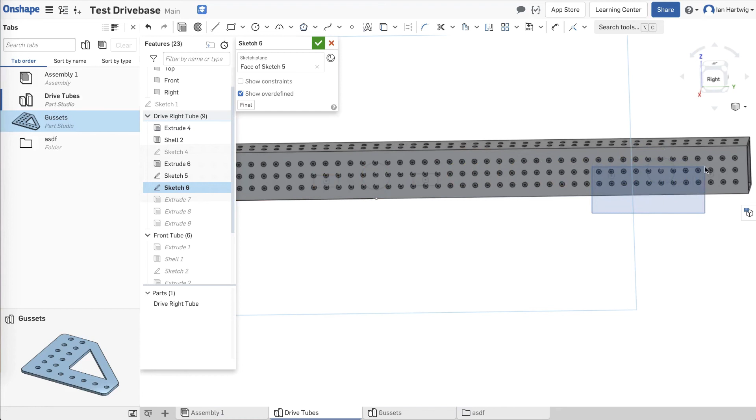I'm going to take these holes over here and I'm going to convert these. It didn't quite select the edge of it, so I'm just going to zoom in and then I can right click and hit construction. And now when I click check out of this sketch, these holes, just like over here, aren't actually drilled out.

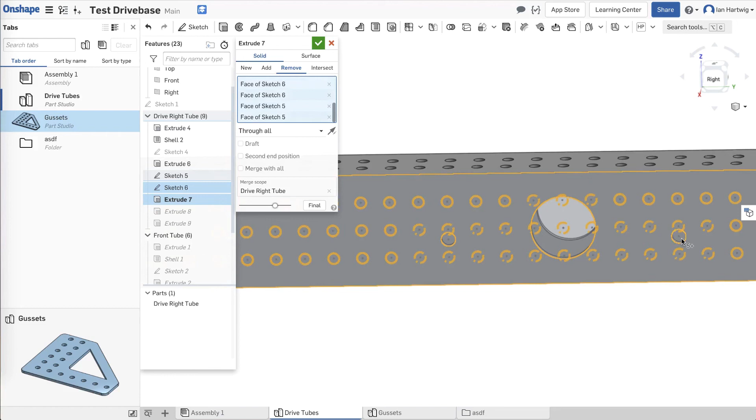When I modified the second set of holes, it did take away some of my geometry for the extrude, so I'm just going to put that back in here. And the reason to add that second gearbox mount is, for example, we did that in 2019 because we weren't sure in the middle of the season whether the motors were going to go in the middle or the back. That creates these asymmetrical drive tubes.

But what's great about having the mirrored part is that the left drive tube here picks up all of the changes that you make to the right drive tube. So now these are true mirrored parts.